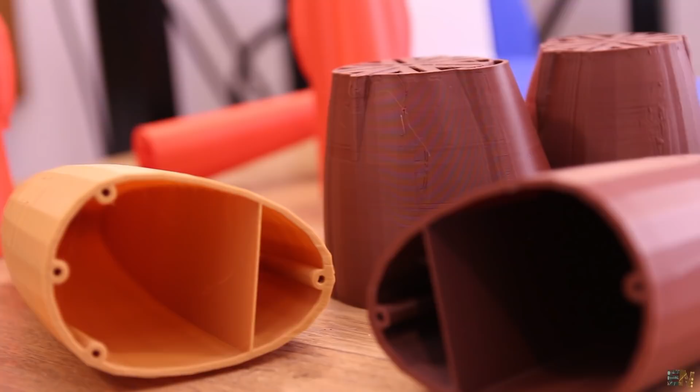but I'm not sure, and I'm not even sure if this will go okay because this is the first time that I will glue this together. So if I screw it up, I'll have to print the parts once again, or maybe just one part. So I hope that everything will go okay. Okay, so let's start with the process.

Hey guys, let's take a look at the design here on the PC. I'm working in Blender. As you can see here, we have all the parts for the plane, and for example I have here prepared for you one part from the left wing. Okay, so we started with something like this. Once I have the entire part of the wing, I've cut it into smaller parts, and this is just a filled part. This is just this filled 100%.

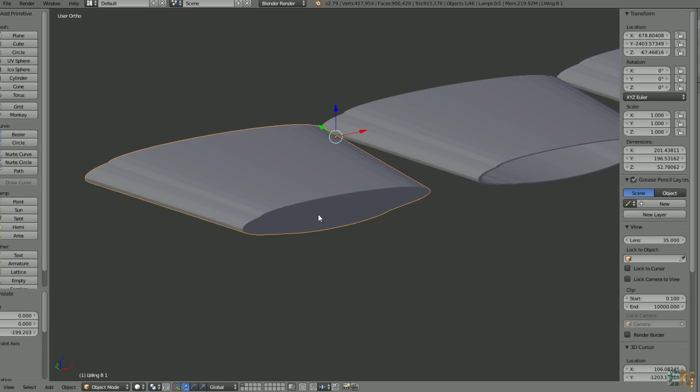So in order to make it weigh less, what I've done was to make a hole in it, as you can see here, and then the next step was to make sure that this hole will make a wall of only 0.8 millimeters. And why 0.8 millimeters? Well, that's because I'm using a 0.4 millimeter nozzle for my 3D printer, and in that way 2 perimeters will equal 0.8.

So if we have a wall of below 0.8 millimeters, I will make sure that this will have only 2 perimeters. And I've tried with 1 perimeter, but that was a mess because it was too weak, and sometimes we have small holes in the wing, so I've decided to go with 2 perimeters, even if it would make the part weigh a little bit more. Anyway, this is the final shape of the perimeters of the wing.

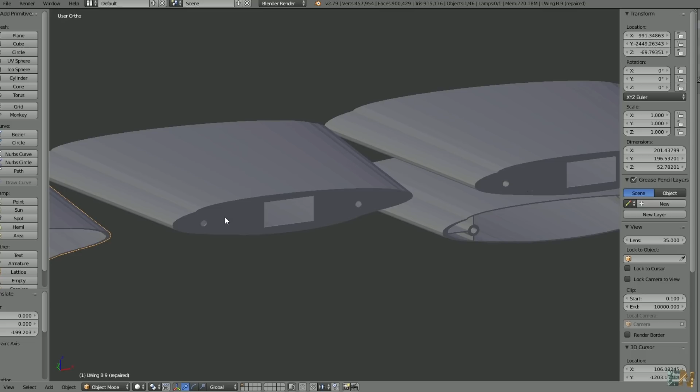And then I've added this part here in order to make sure that we can glue this with the next part of the wing. And also I've made some holes for the rods and the hole for the cable from the servo. But on the other side, as you can see, we don't have that. So in the next step, I've added some support. This one here is the same as this one here, but the bottom one I've cut in half in order for you to see what I've added.

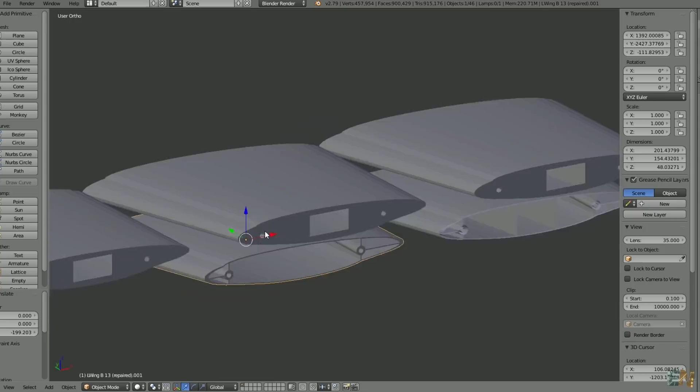First of all, on the other side we also have this part here in order to glue it with the body of the plane. We have the same hole for the cable, but now I've also added the support inside with these tubes for the rods and also this cross as a support. So in this way it will handle more force from above and below.

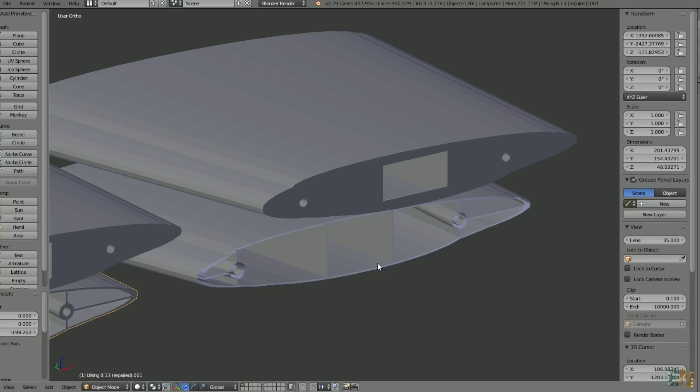And in the next part, which will be the final part, I've also added some support in the middle so we can handle the force in the middle of the wing. And also this will carry the wire from here to the other side of the wing, so it will be like a tunnel for the cable. So together with this support, this could handle a lot of weight, even if it has only 2 perimeters for each support and 2 perimeters all around.

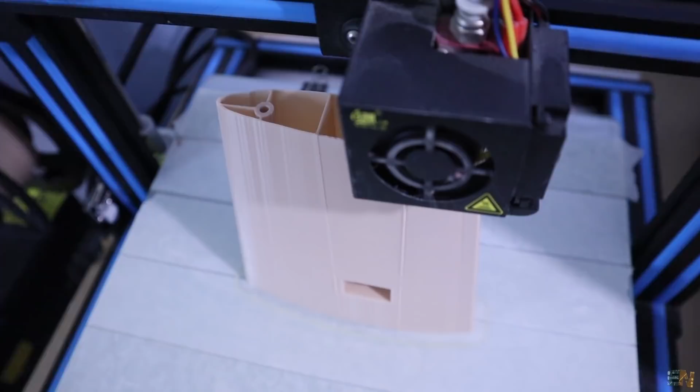Actually, when I was designing this part, I had even more parts for the wing because I had to add a lot more structures, even print the part and then make a few changes. So as you can see, there is a lot of work for me in order to design just one part, because as I told you, I'm not a professional 3D designer, so I had to make sure that everything is okay. And as you can see here, we have a lot of parts and each part has a support inside.

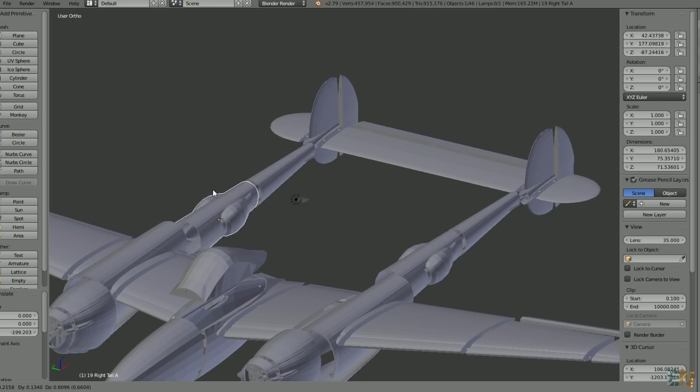Let's just see this one. As you can see, we have this support, we have the tube for the rod. All this is just 2 perimeters. The same goes for the motor mount. We have this here, this is a little bit thicker in order to add a brushless motor, but inside we have some support. We have the tubes for the wood sticks.

Okay, let's get back to our design. Okay, so let's first start by seeing all the parts that we need. So let's start with the wings.

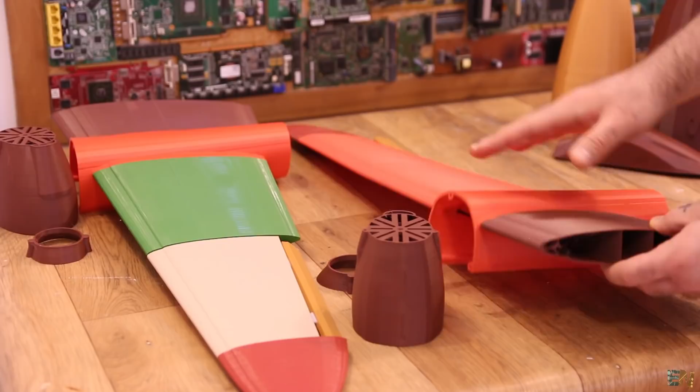So for the main part of the wing, we need 1, 2, 3, 4 and 5 main parts, and we also need one more that will be here below, but until I design the plates for the servos, I won't design that part yet.

We also have this motor mount, so this is a 2 motor plane, so the motor will go here. We screw the motor in place here, and this will be the ring that will cover it. So the motor will look nicer because it will be inside here, so 2 more parts for that.

And we also need the control, which is this aileron here, that using the plastic hinges will move around. We have a place below for the servo. This is where the servo will go. And as you can see, we have a main rod that will go till the tip of the wing.

Right now we have 1, 2, 3, 4, 5, 6, 7 and 8 parts for the main wing and 9 parts with the one below. So we have 2 wings, so that will be 18 parts for the wings. Now let's go to the next part of the plane.

By the way guys, before we go and see the next parts, I would like to say that these are not glued together yet. These are just supported by the carbon fiber rod that is inside of the wing. And I don't even know the final weight of the plane, because as you can see, I've used different kinds of materials. Basically these are all PLA material, but I've used a green one, a red one, a brown one, so I'm not sure how much filament I've used for the entire plane.

But don't worry, once we see all the parts, I'll weigh each one separately and I will tell you the total weight of the plane for only the 3D printed parts, and in that way you will know how much filament you need for this plane. So let's go and see the rest of the parts.

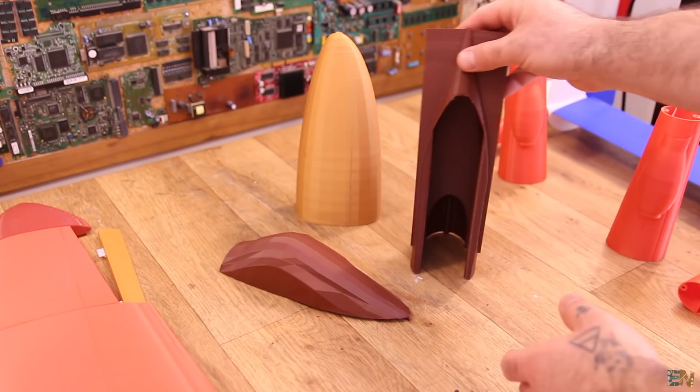Okay, so these are the next parts, these 3 here, and this will be the middle part of the plane, and this is where the battery will go, and from here we'll have also the radio receiver in place. So through these holes we'll go to the tail and to the wings with the servos for the controls, and using the battery placement we can control the center of gravity,

because as you can see, this is the nose part. This will be quite big, so we have some space to move the battery in order to change the center of gravity of the plane.

And then we have the top of the cabin. This will be the cabin for the pilot, let's name it like that. And maybe I'll add some magnets here, and it will click in place like this. Very nice, so it's very easy to take it out, look at the battery or the receiver, change something, and then put it back on. And that's it. This is the middle part of the plane. Let's go to the next parts.

Okay, so finally these are all the tail parts, but as you can see we have the middle tail part with these 2 here. And probably here I'll place the servos together with the wing part, and each part here will have some outputs, so we can place a very fine metal rod that will go to the controls of the tail. And for the tail, we have one here, 2, 3, 4, 5, and 6.

So 6 parts for the main tail. And then we have the elevator and 2 rudders here for the controls. So that's pretty much all we have for the tail. These are not glued together, they are just joined together with the wood stick.

So remember, we place the servos here in this part, and then with the metal rods through these very small holes here, we get here, and here we can control the rudder and also the elevator. So these are all the parts that we need for the plane. So let's see the next part.

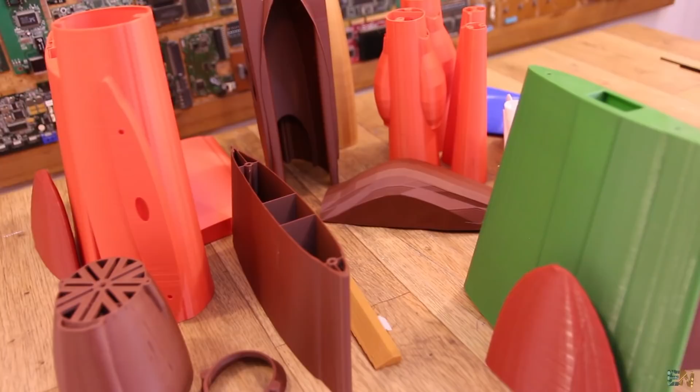Okay, so here we have all the parts, and if I counted right, these are 35 parts without including the landing gear parts with the wheels and all we need for that, because I haven't designed that yet. So now let's go and check the weight of each part without including the battery and the rods, only the 3D printed parts, in order to know the total weight of filament. So for you to know how much filament you need to print these parts. So let's measure the parts.

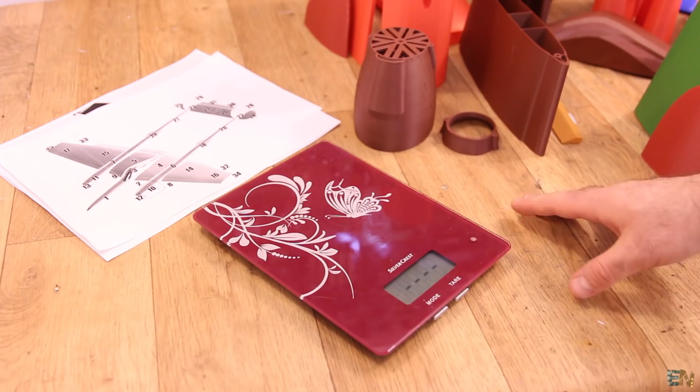Okay guys, so I'll use this scale to measure each part, and then I'll fast forward the video in order to show you the weight of each part, and I'll write it down here because I have the design. So let's start with the first one, and I will fast forward the video for you guys.

Okay, so that's it. So let me just now make the sum of all these values here and give you the total weight of the 3D printed parts. Okay guys, so I made the sum for all the parts, and as you can see, it's almost 1.5 kilos, 1,472 grams to be more exact. And I think this won't be a problem because of the size of the wings, because as you know, the bigger the wing, the more area we have, the more it will be able to lift.

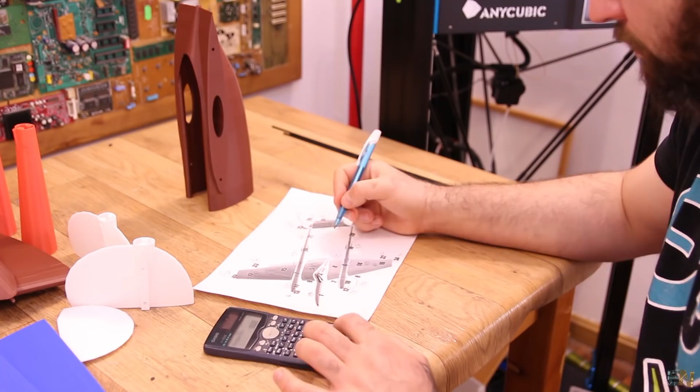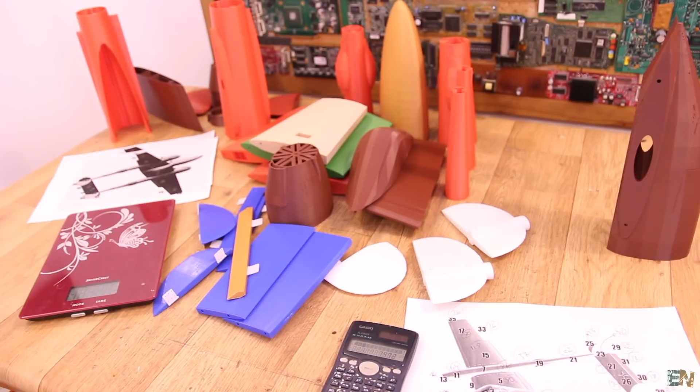So this is a huge plane. I mean, for me it's huge because this is the biggest plane I've ever made. The wingspan is more than 1 meter, so I don't think it will be a problem, because plus the battery and the motors, maybe this will have a little bit more than 2 kilos. And I think that is a pretty good, decent weight for a 3D printed plane. So let's see the next part of the video.

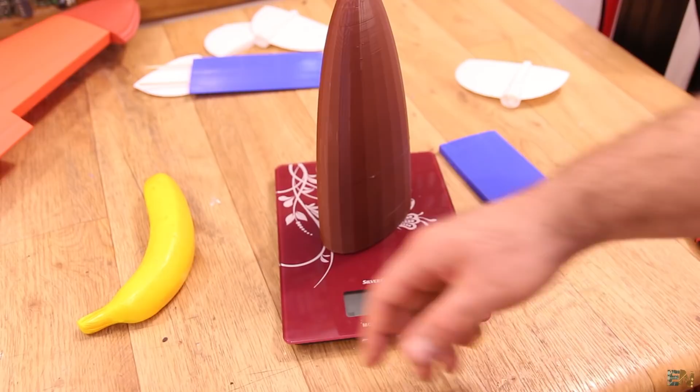Okay guys, so only as a reference, I'll weigh this nose part. As you can see, this part is quite big. We have the banana for scale here. So even if this part is quite big, it weighs only 69 grams or 68, and that's quite okay for a part this big. Let's weigh the other one. This one, for example, is quite strong, but as you can see, this part is empty. We have some structure inside and only one layer, but the rest is empty and it's very, very light. Let's just measure it. Only 29 grams, and this is a pretty big part.

Okay guys, so now that we know all the parts and the weight of each part, we can go to the next part, which is just assembling the 3D printed plane. For that, you will need some sanding paper in order to smooth the parts and glue them. You will also need the carbon fiber rods or maybe the barbecue wood sticks. I will use both of these, maybe this for the smaller parts and the longer rods for the wing and for the tail. And you will also need some pliers or something to cut this.

And the most important part is, of course, the super glue and the activator. You will need this activator because you will want to go very quick when merging the parts. Once you stick the parts together, you will want to go as fast as you can, because otherwise it will stick to your hand, the part will move, and you will make a bad joint. So yes, you will need an activator. Just for a few dollars you can buy this, and it will help you a lot. So let's start, and I think we will go first with this central part of the plane, which is just these 3 parts.

By the way, not any kind of super glue will work with any kind of accelerator. In this case, this is an activator for cyanoacrylate. So I bought this super glue, which is compatible with this activator, and I'm not sure, but I don't think that any kind of super glue will work. So I bought a few more of these from eBay in order to make sure that I will have enough for the entire plane. So let's start with these 3 parts. First I will join these 2 parts together.

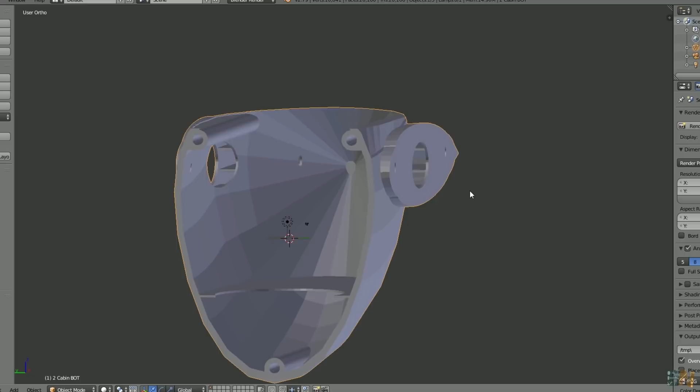I will show you the design on my PC and maybe make a zoom here, and as you can see, it has a double wall inside, and also we have the holes for the rods from the wings. So in this way we can glue it inside. On the outside we can place glue here, and it will make a very strong connection with the wing.

And at the same time I had to think where to place these holes for the rods and the support to support the battery, and the next connection which is the nose. And with these holes we can pass the wires through here, and that will go to the wing through this hole here, and continue with the wire to the other parts and to the controls of the plane.

So what I will do now is to just put some barbecue wood sticks in this hole and these two, and with that we can merge these two parts together. And I won't add this one till the plane is ready, because here I will place the battery and everything inside. So once we have this middle part, maybe next we'll make the wings.

So let's just glue this in place. So as you can see, I have the barbecue wood sticks inserted. So now I will place a little bit of glue here all around, and then join these parts together. Place the activator, and that's it for this middle part. So let's just do that.

Okay, so that's it. The middle part of the plane is ready, and it feels quite strong because this structure together with this one makes a very strong bond. Okay, so I think now I will go with the wings.

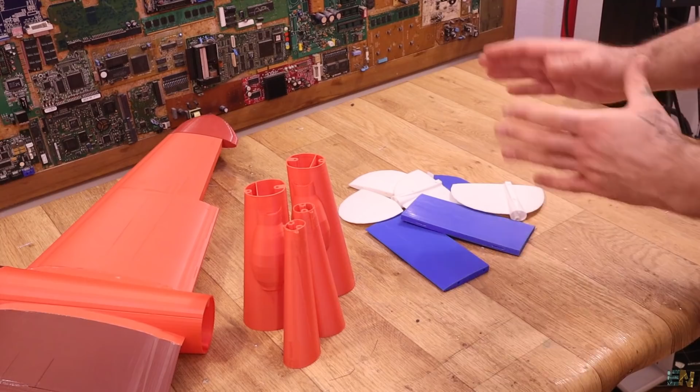Okay, so for the tail we have the back side of the tail and the middle or front part of the tail with these tubes here. So first I'll make this one, and once we have this entire back part of the tail, we'll merge it with this one and then with the entire plane, and hopefully we won't have any problem and the entire plane will be ready. Okay, so now I have the entire back of the tail glued together, and I think the next part that I will do is join these parts together, then join these parts together with the end part of the tail, and I will finally add the controls, the rudders and the elevators.

Okay guys, now I have the middle part of the tail, so all I have to do is to glue this here and then add the final part of the tail, and once we have the entire plane, I will add the controls, the ailerons, the elevator and the rudder, and then we'll add the servos and the electronics. So, okay, first I add this small part of wood here, I add the glue and then I stick this here like this.

And that's it. Okay, now I have the entire tail, but now this is a tricky part because I have to connect this here, add glue on this side and on the other side at the same time. But I think that I will glue this first and then just split this apart, add glue and glue that after. So let me just, I'm not sure how to do this, maybe place it like this.

Now all the parts are glued together. I've also added some magnets here so we can close this very easily like this. So it will stick in place here with the magnets. Anyway, now all I have to do is to add the controls, the ailerons, the rudder and the elevator, and then we flip it and add the servos.